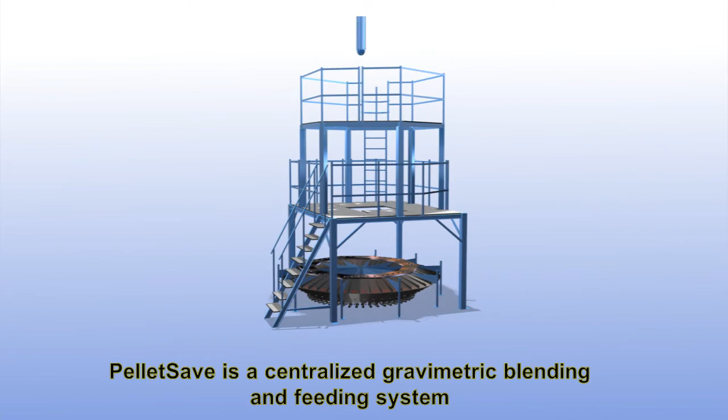Liad, Weighing and Control Systems. PelletSave is a centralized gravimetric blending and feeding system designed to be used with multiple raw materials and processing machines, providing a complete factory-wide solution.

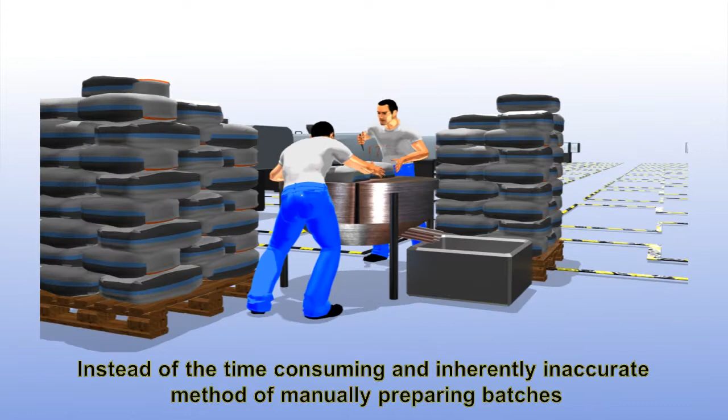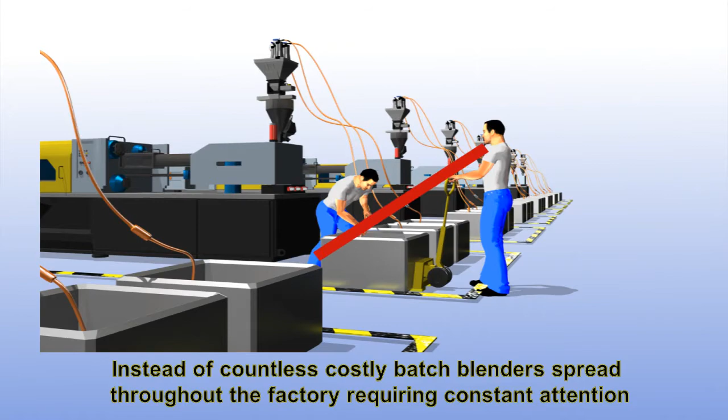Instead of the time-consuming and inherently inaccurate method of manually preparing batches, instead of countless, costly batch blenders spread throughout the factory requiring constant attention, Liad is pleased to announce the ultimate solution, PelletSave. PelletSave is a completely modular system specifically engineered and tailored to meet a customer's needs.

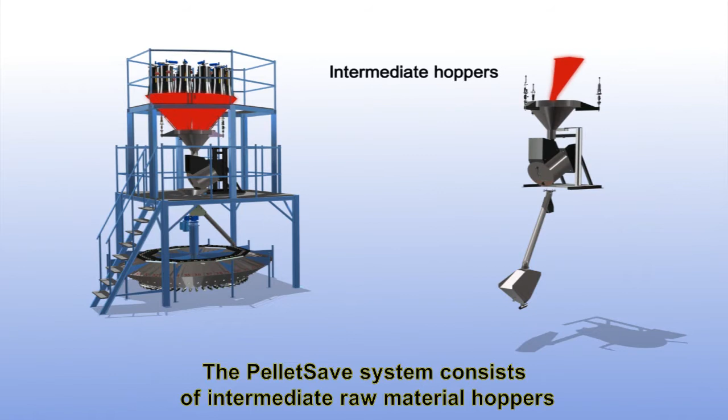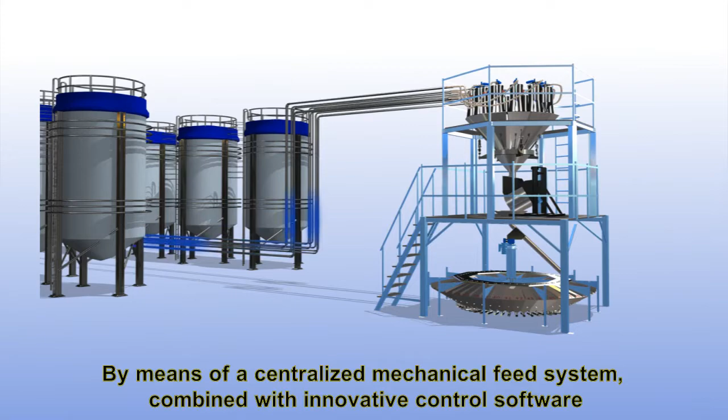The PelletSave system consists of intermediate raw material hoppers, a weighing hopper, a mixer, a dispenser, and buffer bins for the mixed material. By means of a centralized mechanical feed system combined with innovative control software, the PelletSave system is able to weigh out and prepare the precise mixture required and transport it to each of a factory's production machines according to each machine's job order.

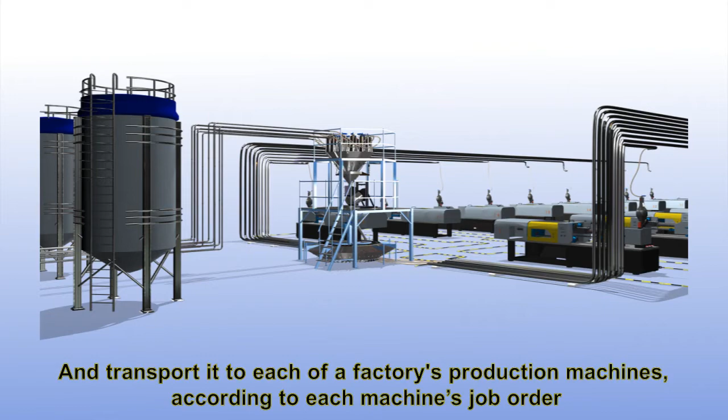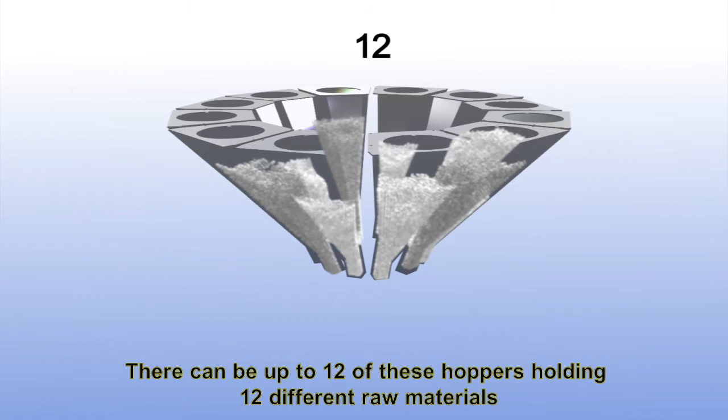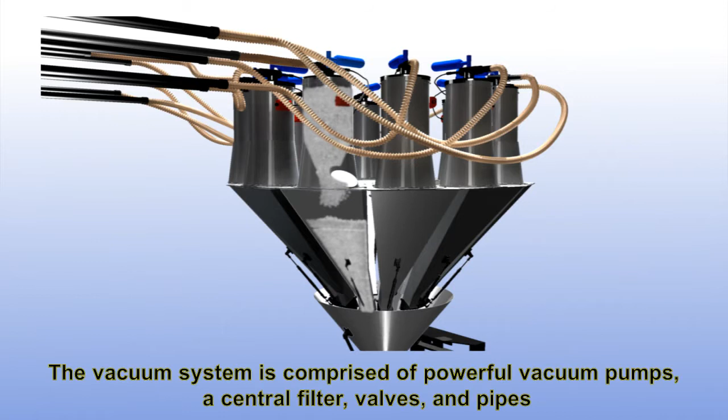At the top of the PelletSave system sit the raw material hoppers, one hopper for each type of material. There can be up to 12 of these hoppers holding 12 different raw materials. The Liad vacuum system automatically fills the hoppers directly from raw material silos. The vacuum system is comprised of powerful vacuum pumps, a central filter, valves, and pipes, all administered by Liad's sophisticated control system.

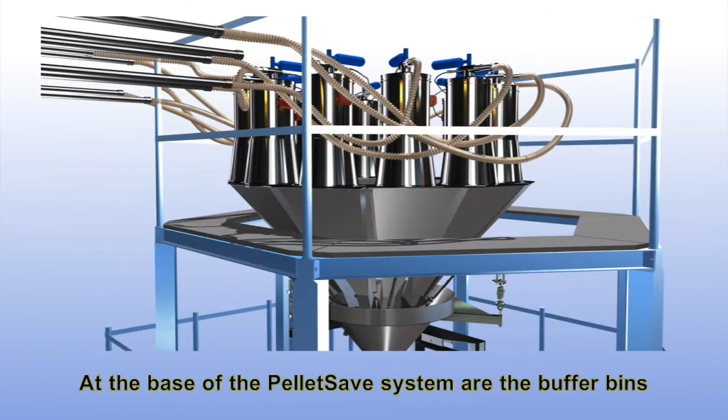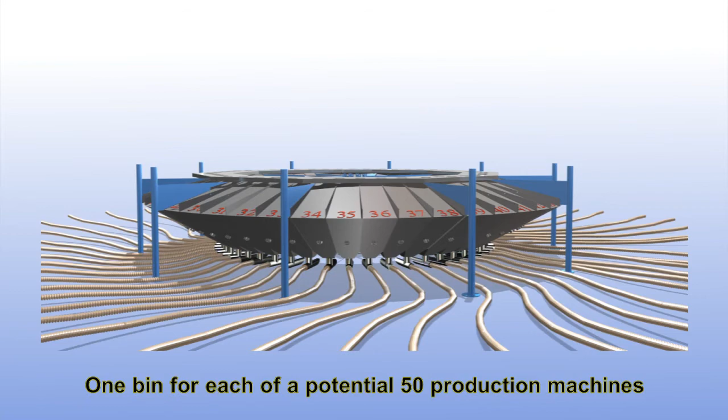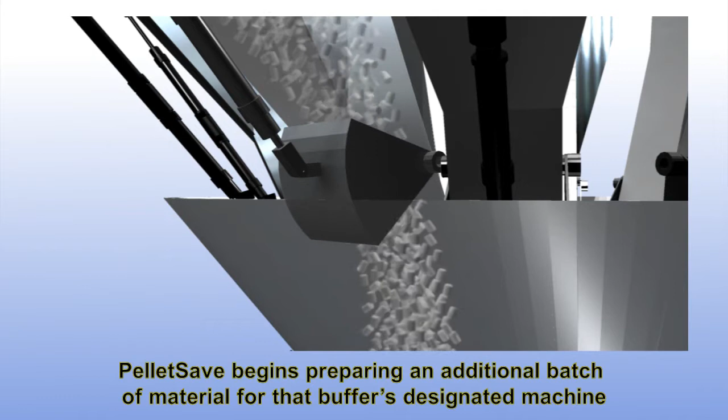At the base of the PelletSave system are the buffer bins. Anywhere from 8 up to 50 dedicated buffer bins hold the batches of mixed material, one bin for each of a potential 50 production machines. When the level of raw material in the buffer falls below the sensor, PelletSave begins preparing an additional batch of material for that buffer's designated machine according to that machine's specific recipe.

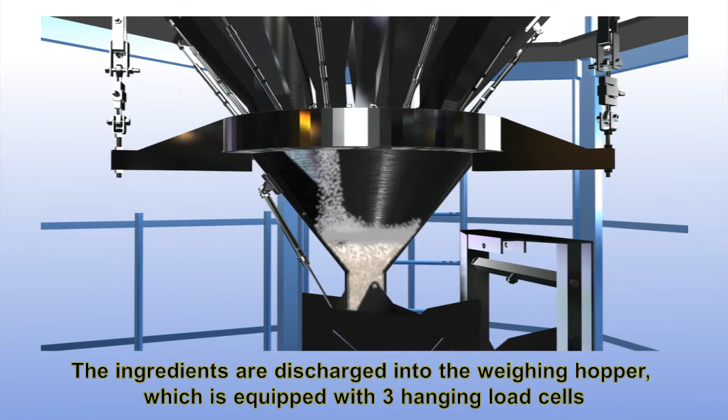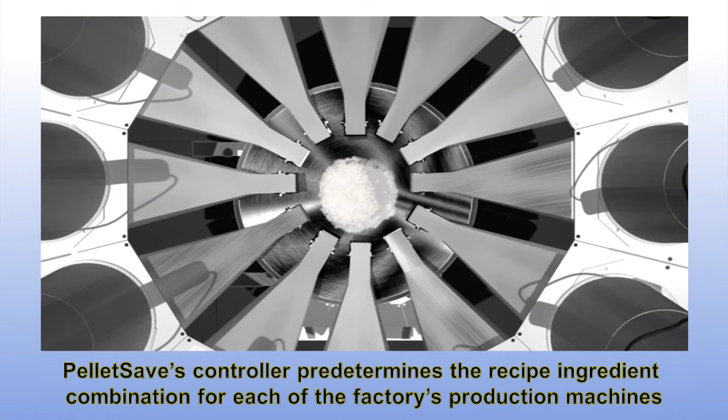Each ingredient is discharged in turn from its intermediate hopper. The ingredients are discharged into the weighing hopper, which is equipped with 3 hanging load cells. PelletSave's controller predetermines the recipe ingredient combination for each of the factory's production machines. The relative quantity of each component is derived from this predefined recipe.

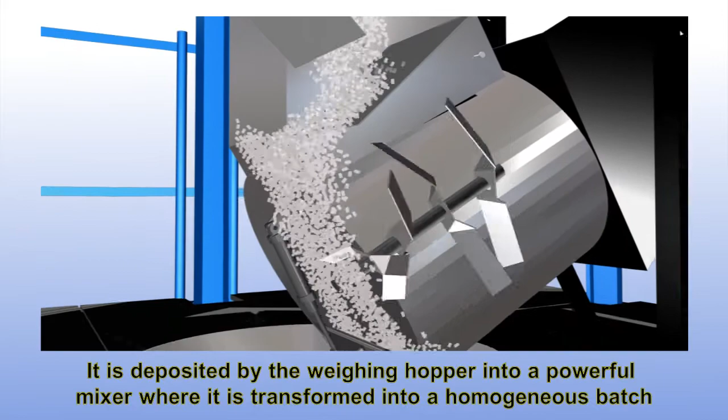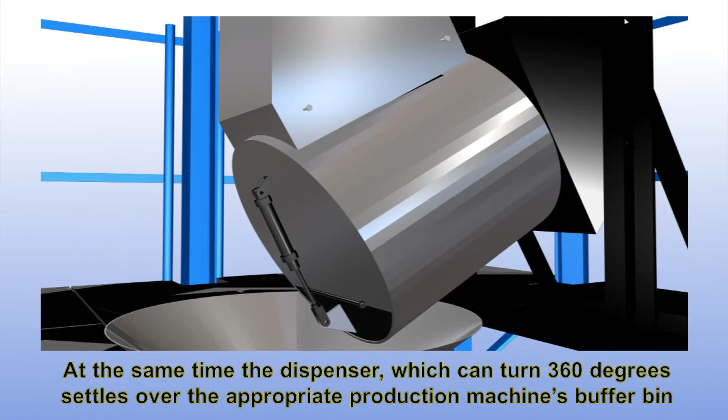After each component has been weighed and the batch is ready for mixing, it is deposited by the weighing hopper into a powerful mixer where it is transformed into a homogeneous batch. At the same time, the dispenser, which can turn 360 degrees, settles over the appropriate production machine's buffer bin. When mixing is complete, the batch is conveyed by the dispenser to the machine's buffer bin. The buffer now contains a ready batch.

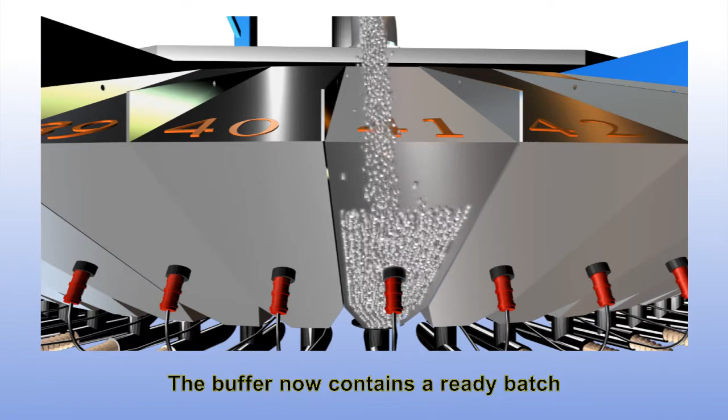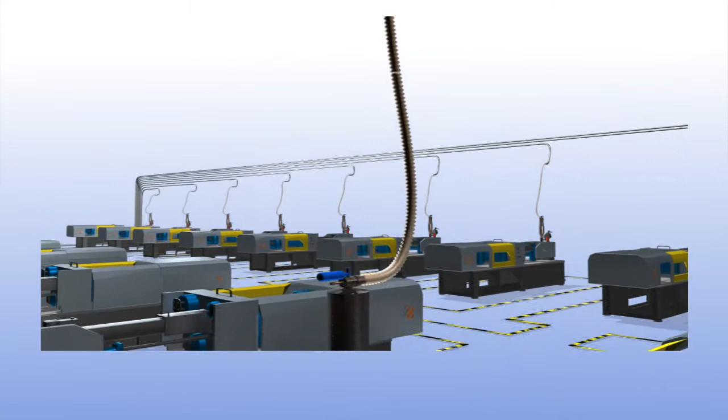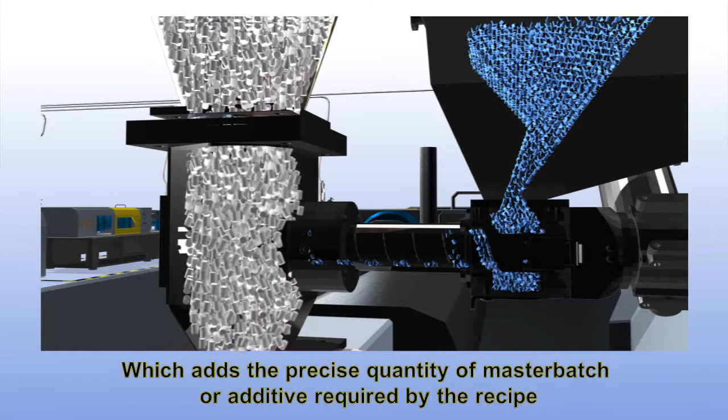Under the direction of the Liad controller, a centralized vacuum system conveys the prepared batch to the appropriate machine. The recipe is now completed by the Liad ColorSave dosing unit, which adds the precise quantity of master batch or additive required by the recipe. Transport of the raw materials from the storage silos through the PelletSave system is entirely automatic with no need for human intervention.

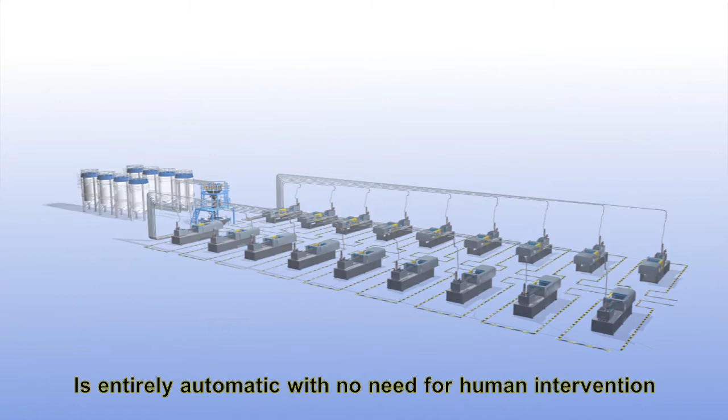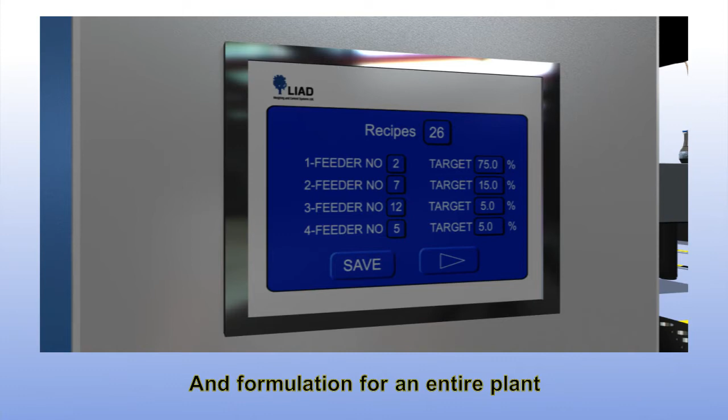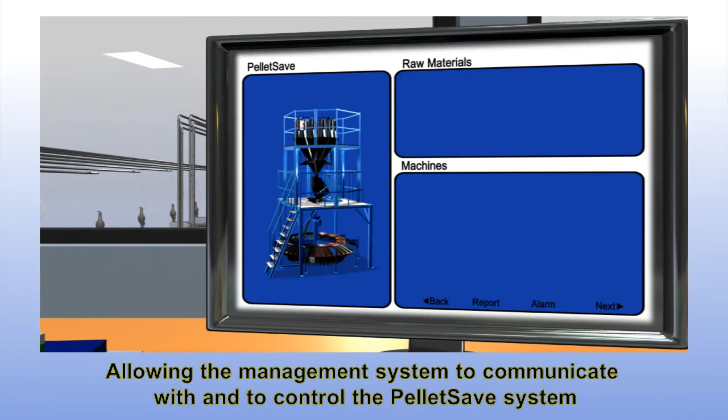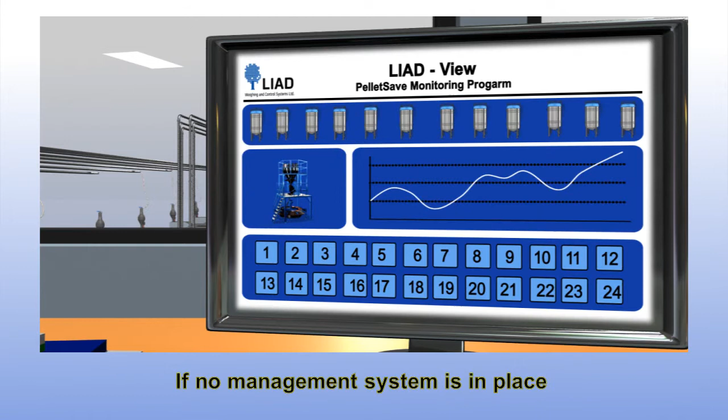PelletSave includes a sophisticated software package that enables comprehensive control of raw material consumption and formulation for an entire plant. The software enables complete control over the operation of PelletSave. PelletSave easily interfaces with the production floor management system, allowing the management system to communicate with and to control the PelletSave system, including the centralized material transport system and the ColorSave dosing units. If no management system is in place, then the Liad View monitoring software can control PelletSave, manage recipes, and monitor material consumption by means of a standard PC.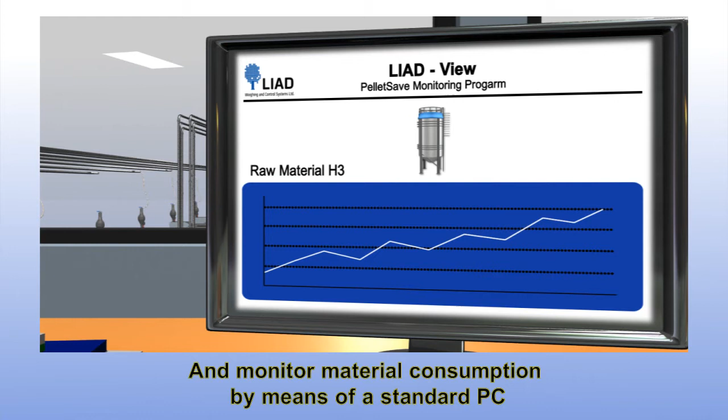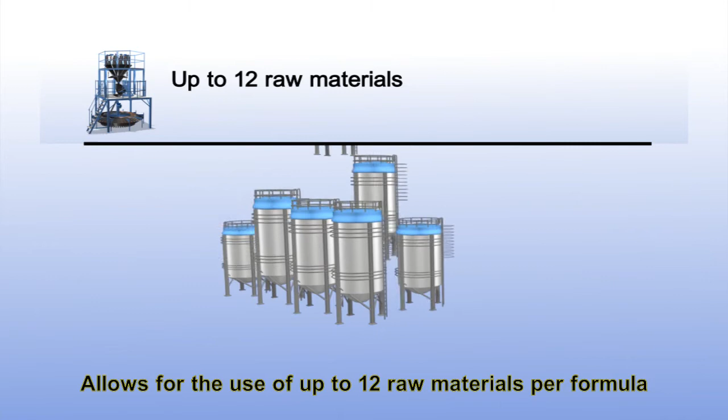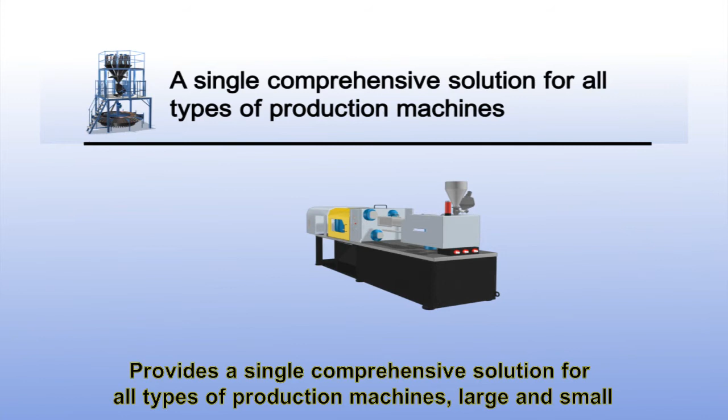PelletSave significantly reduces installation costs compared with similar dosing systems, allows for the use of up to 12 raw materials per formula, and can feed up to 50 injection molding, extrusion, or blow molding machines concurrently, provides a single comprehensive solution for all types of production machines, large and small, affords greater accuracy and superior batch homogeneity,

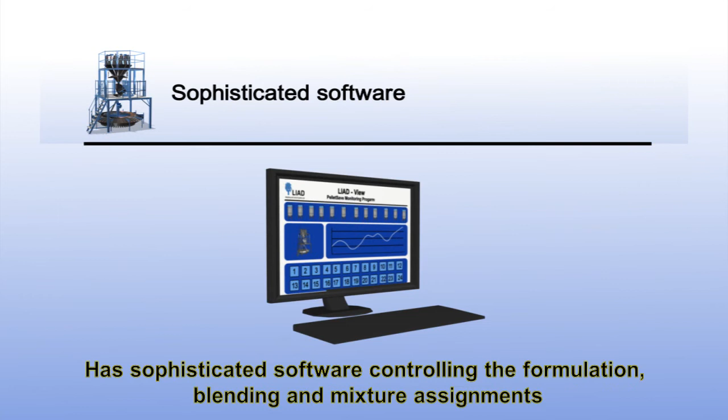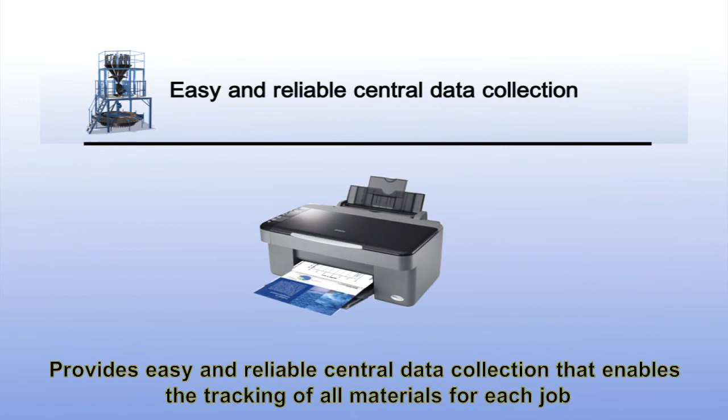has sophisticated software controlling the formulation, blending, and mixture assignments, eliminates the need for manual intervention when changing jobs and mixtures, provides easy and reliable central data collection that enables the tracking of all materials for each job, has a simple, robust mechanical structure with few moving parts compared to conventional systems.